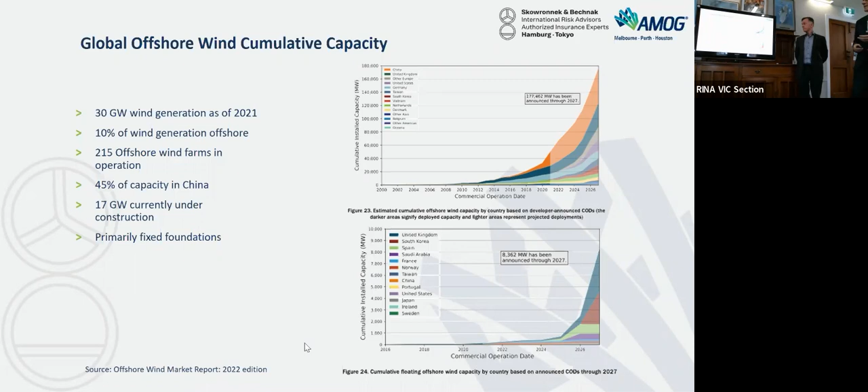We also have some gravity-based projects in France, a big one now, also very interesting perhaps for Australia, made from concrete and also very cost effective. A lot of things are now going on, and this could be the same in Australia.

If we are going offshore now in the Australian context, we have to take into account that we should do it as simple as possible. This will also be the message of today.

We have some environmental pressures, which means, as Chris explained to me, that we also have some new decisions from the courts in Australia regarding the processes and which parties have to be consulted before a wind farm gets consent. So a lot more parties will be involved in the future.

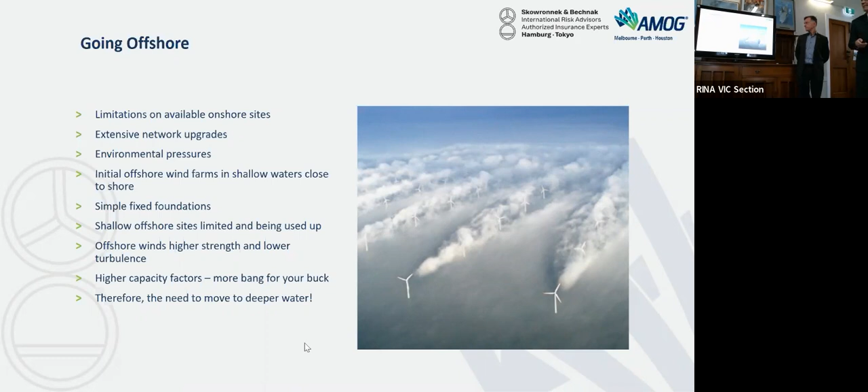From the turbine development, we can see that at the moment the biggest ones are under development at GE, Vestas, and Siemens. But really the biggest one at the moment, which has already been built and is in the testing phase, is the 18 megawatt from Mingyang, China.

This is important for the whole logistics process when you're talking about offshore wind - which vessels do I need? With the megawatt classes, we have always increased the hub height.

This is one of the topics we could discuss later - how, for example, in auctions from the beginning, the government could positively influence the existing logistics in a country. One example: if the government would limit the hub height to a certain number of meters, say 120 meters, and everyone had to bid for a turbine with a maximum hub height of 120 meters, you would have much more vessels available. No one is doing this at this stage, but perhaps in the future we will come to solutions like this already from the auction.

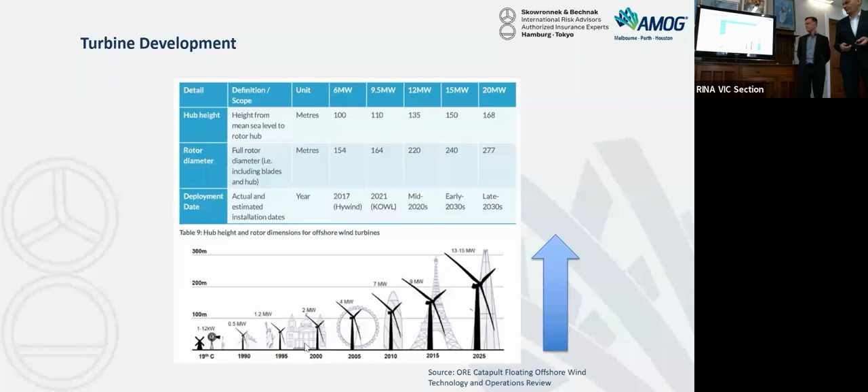In floating offshore wind, we have a similar evolution, and it's going on really fast, because the first demonstrators had 2 megawatt turbines around 10 years ago. Now, in the meantime, the pilot projects which are running, for example Hywind in Scotland or Kincardine in the UK, are using 9 to 10 megawatt turbines already on floating. So this is not the future; it is already running.

And we have many different types of floaters at the moment. This is very challenging - we're already talking about this in the WFO committees, and we have around 80 floater types, so 80 designers, 80 different designs, 80 different production cycles. Very often this is the challenge we have when it comes to how to finance this and how to bring it into the stream so that it can be produced, because the financiers always want to see more track record, or they want to demonstrate capabilities with a demonstrator.

We don't have enough demonstration sites worldwide. This was a topic we already raised 2 weeks ago - we need more demonstrator sites. Some designs are already challenging the existing floating structures by bringing in, in their opinion, more intelligent ideas with respect to mass production, to serial production - using a very similar concept as is already floating, but with some more ideas with respect to cheaper future production. At the moment, we will simply see how this goes on.

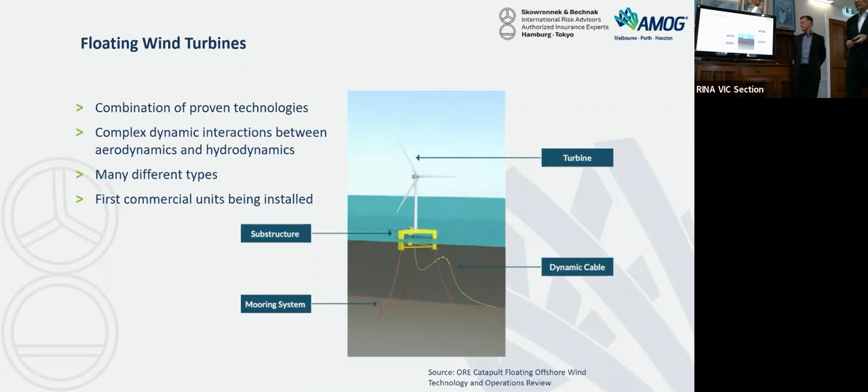Next slide, please. Yeah, this works. This is from the 22nd of November. DNV made a study about floating wind turbines and how far they are already proceeding with respect to track record. So, without naming them, DNV has divided them into different technical readiness levels.

So this is the TRL. NASA uses that, for example, but the offshore energy business uses a slightly different TRL, which goes from 0 to 7. NASA is 0 to 9. Offshore energy uses 0 to 7. DNV uses the NASA definition, and at the moment there are 2 structures at TRL 9 level.

So the semi-subs, which doesn't mean semi-sub in general. It's one or two semi-sub types, which people working in the business know who is meant. One is this, and one is this concrete spar, which are the big spar buoy projects in the North Atlantic, which are also running at the moment, operating and running quite well. So the semi-subs and the spars are running quite well.

The maximum number of floaters per project, as information for you, is still at the moment 5. So in Kincardine it's 5 plus 1 smaller one, so 5.5. Then in Hywind Scotland, also 5.

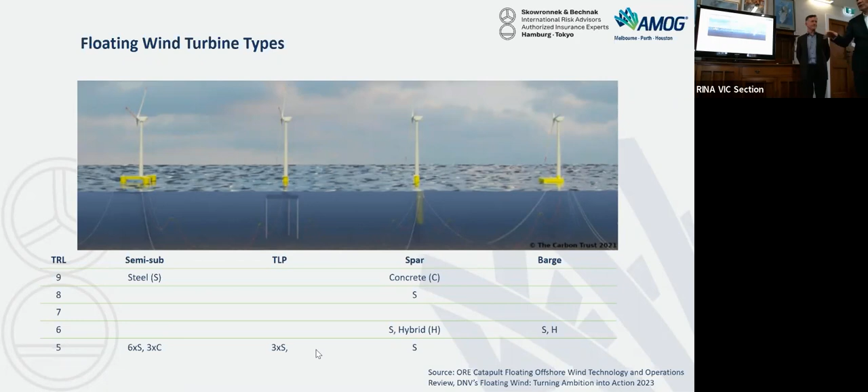Because banks and insurers really need this minimum safety level. Yeah, and that's it from my side.

Thank you. That's right. So as Ralf was mentioning, when we come to Australia, we have quite obviously a very good wind regime down in the southern parts of Australia - off Tasmania, southern Australia, South Australia, the bottom part of Western Australia, actually even building up towards Geraldton as well. So particularly some sites there, and there are a few sites where we do have water depths out to about 60 metres that are also far enough offshore to limit the challenge of visual impact.

So this is where I guess the step from bottom fixed to floating comes into play, because you've got that restriction of proximity to coastline and viewing points, and then wanting that to be, I guess, the social driver to push further offshore from a visual impact point of view, and that competing with water depth. So as Ralf was saying, bottom fixed turbines are typically out to 40, 50, 60 metres currently.

There's quite a bit of work going on currently looking at the next class of turbines, the 25 megawatt class. Can we use dynamic vibration absorbers, active and passive means, to actually control some of the structural vibration that these units go through, once you have a column that's 60, 70 metres tall standing in the ocean, subject to wave loading and fatigue, with a nacelle weight of 1,000 tons in the future, at 100 metres height. So again, large vibrating structures, and that's no different to a lot of the naval architectural issues you see in standard ship design.

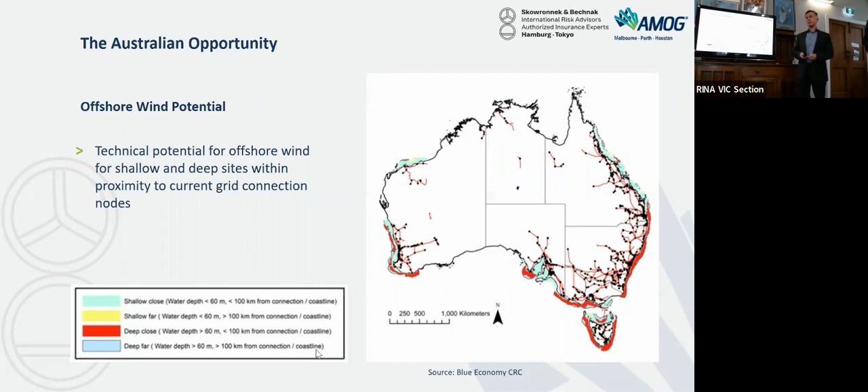So talking about the challenges. Again, it's this whole issue of how you execute these projects with minimum risk, and then how you mitigate any loss during production, because these things are going to operate for 25 years. You're going to rely on them from a power production point of view. So how do we manage that? There are quite a number of challenges. Obviously the key one at the moment is supply chain. So how do you actually build some of these projects?

If we take a 1 gigawatt project, that may be 40, 50 individual units. So how do you actually build, ship, fabricate, repair, install these units? And how do we have the ports that sit alongside that to allow this to happen? If we go to floating units, then you need more space, because you've got construction, or maybe the final fabrication of these floating hull forms, and then there's the whole marriage of the turbine towers onto the floating hull form, and then placing on the nacelle.

So these units are big. If we're talking 250, 300 metre rotor diameter, you can't park many of these alongside each other. So lots of issues. Then we'll talk about costs and how we reduce costs, because obviously this still has to be competitive in terms of power production cost. And then we'll delve into some of the challenges for maintenance and repair.

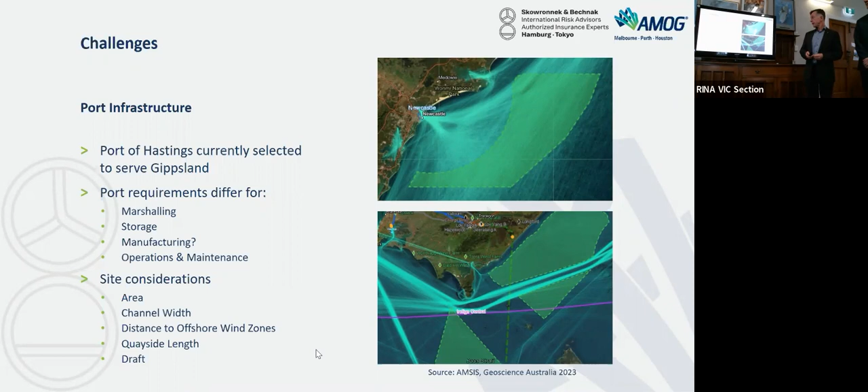In terms of cost, floating offshore is currently about 4 or 5 times more expensive than fixed offshore, but over the next 10 years that gap is expected to close rapidly. And the LCOEs are very competitive - typically the levelised cost of energy for new gas turbine or coal-fired power plants is above the current fixed offshore wind costs, so they are competitive.

In the Australian context, we'll be a step up higher again, because now we have to deal with our remoteness and stretching that supply chain down into this area. So that's going to be a challenge for us, and we'll need to look into things such as standardisation - how we make something that is able to be repeated at scale with low risk.

Do we push towards the larger turbines? As Ralf was saying, that comes at a cost because the newer turbines don't have the track record. So how do we balance that out? Do we, as an operator, put yourself at technical risk because you've got a new turbine operating that may suffer unexpected issues or failures, and what are the impacts of those - in the context of an offshore wind farm having multiple repeat units with potentially the same common cause failure modes?

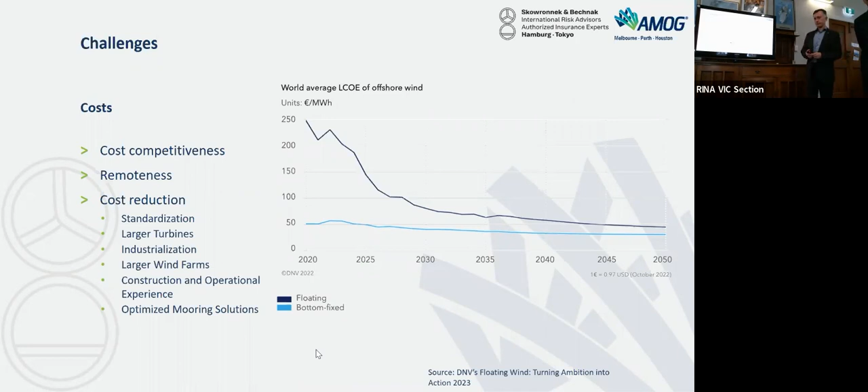Chris, sorry, just when you've got that graph up, do you know what the cost is for solar, which is obviously such a big topic in Australia? Not Andy, Klaus, you might be able to dig that up in the background. No, I don't have that to hand.

Then when we get into the operating and maintenance side, obviously these units will be offshore, so there's taking manned access out to these platforms for painting, repair, and all of the maintenance that needs to go on to these systems. And also things such as lightning - lightning strikes are an issue. Based on European experience, lightning does hit these structures and it does damage the blades.

If we look at some of the lightning density information that's available, the North Sea has fairly low intensity of lightning strikes, sort of akin to down off the southern Victorian area. But once you start going further up the coast towards New South Wales, the lightning density changes to be much more akin to that of Japan, where typically it's about 100 times higher density.

So the expectation is there's 1 to 2 blades per year per wind farm that are going to need to be replaced. For these large turbines, these blades may weigh 100 tonnes, and they're 150 metres up in the air, potentially on a floating moving structure. So how do you go about changing these in an efficient manner? This is a risk that's a given - it's going to happen - so you have to be able to accommodate that.

We know a lot about how it occurs and about the repair costs. The only difference is the probability of occurrence, which is much lower in Europe. So if you know it will occur, and you already know the costs, and you know how much higher the probability of occurrence will be, then this is already a case you can really calculate. But it's not a very nice case for the OPEX, the operational expenses - and the guys in the wind farms should really take this example into their calculations, which at the moment very often is not done. So this is one of the points we would like to introduce to you today.

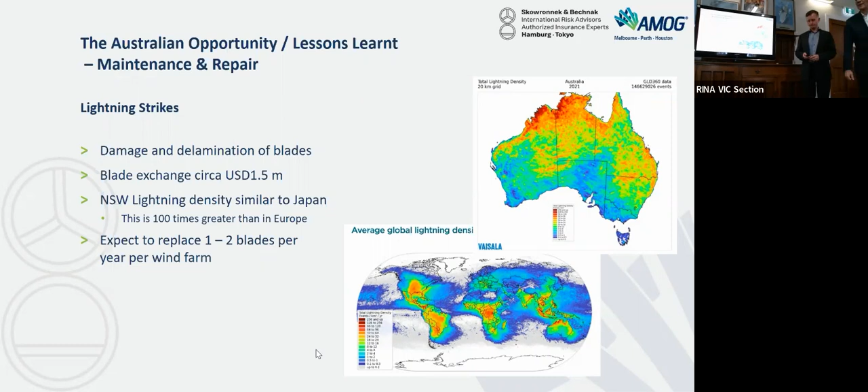So in terms of major replacement, as Ralf said, on these larger turbines, the nacelle and rotor mass is typically around 1,000 tonnes. So a gearbox unit may be well over 100 tonnes to replace. And if these are on fixed structures 150 metres in the air, how you actually get those down safely onto a vessel to take back to shore and replace it.

There are various options in the North Sea, where you have access to big offshore installation vessels. Some of these can do those replacements directly with very large semi-submersible crane vessels. If you're in shallow enough water, you may be able to do that off a jack-up. But once we start stepping into deeper waters and into the floating area, there are new solutions. There's a whole raft of new technologies now coming onto the market in terms of self-building or self-climbing cranes, so you can attach these to the tower and climb up it.

And once you get down into the Australian context, where you don't have access to these vessels, these types of repair activities are going to be critical about how you approach that, and what sort of system-wide approach you take. For instance, do you share with another developer or competing wind farm an insurance pool for this type of equipment, so that you have that ready if needed and can both access it as required.

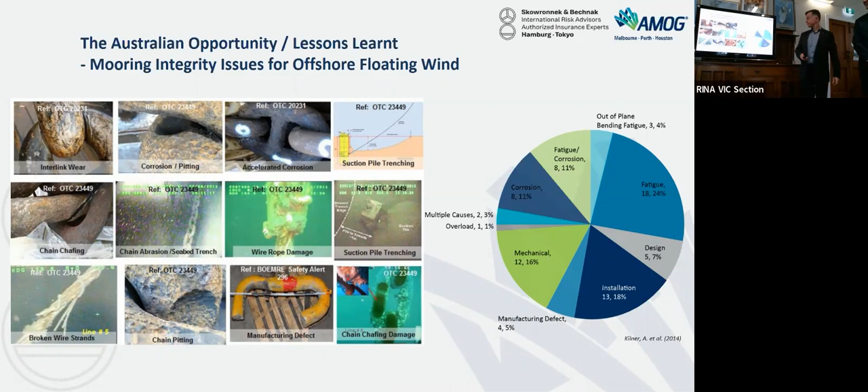And I think that's a very good point to hand back to Ralf on.

Yes, thank you. So we have one example which goes in this direction with respect to operation and maintenance expenses, and how it's at least as important not only to design for risk mitigation, to have a robust design, but also from the beginning in the design to implement loss mitigation measures, which for example make it easier to reduce the repair costs and the downtime. We have some actual examples we would like to show you.

Finally, this did not take so long. Once the action was planned, after this unscheduled maintenance had been identified, they needed 2 months for the organization. I think 2 months was very short for an unscheduled maintenance like this, where you have to organize facilities somewhere. First you have to consider that you cannot tow it to the next port - that's number one. I think they needed at least 2 weeks until they saw this was not possible. Then they had to decide to tow it and get the licenses to tow it through the whole North Sea to Rotterdam. It was a great job they did.